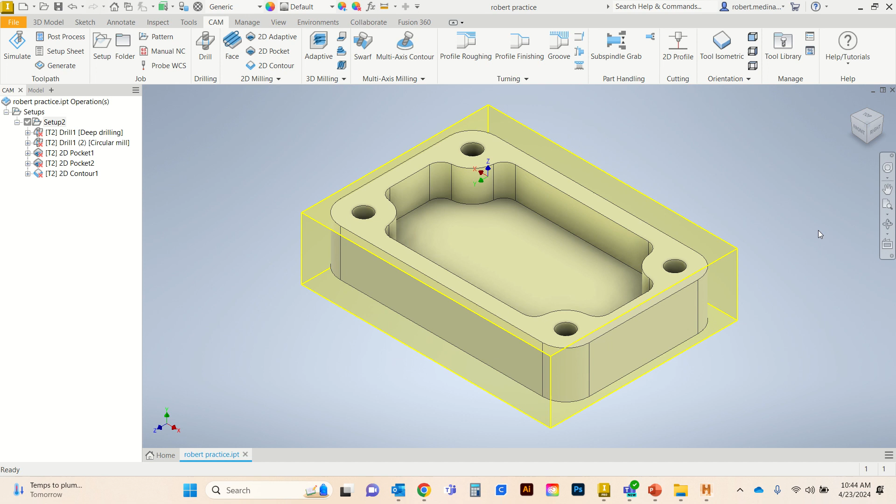So we will be using this model still from the first project. If you remember, we did all of these operations on the top side. So what we can do now, remember we put the engravings on the back side. So we will have to make a new setup.

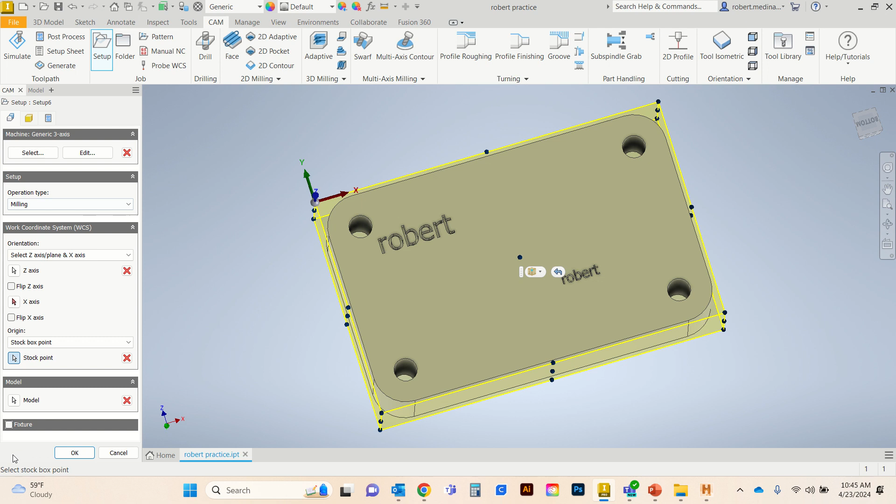So we will start with selecting our machine, make sure we're under milling, select our work coordinates. So make sure our Z is pointing up, select our 0, our origin, select this upper left hand corner, and select the model. Let's go to the next tab.

I'm gonna do a relative size box. I'm gonna hit 0 because all of this has been machined already, and I'm gonna hit 0.005. This is for illustration purposes, and I'm gonna select 2 so I can go to the next work coordinate.

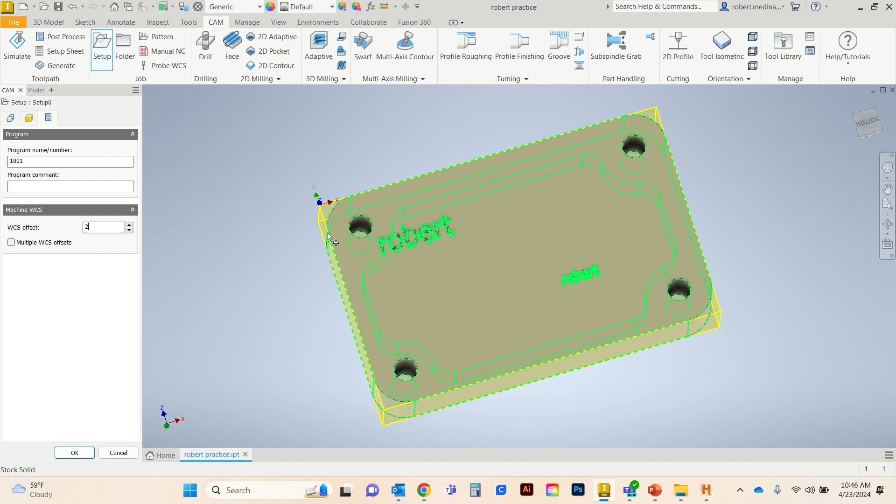If you leave this alone, it will default to G54. When you type in 2, it will default to G55. So it helps keep the other work coordinate independent to this one in case you need to make any adjustments. You can hit OK. So we have our second setup here.

So we can go under 2D milling, select engrave, and select under tool, go to VF2 or whatever you put your tool. So I'm gonna select the previously made tool for engraving plastics. Remember how I put those notes in there so you can see that, and hit select.

So now it auto populates everything that we inputted as we defined our tool. Our coolant, so it's gonna default every single time we select that tool to air through tool, spindle speed, surface speed, ramp spindle speed, our feed rate.

In case you wanna use a specific tool for different materials, you could duplicate a tool and change some of these things. So this would work. This tool would work on both plastic and aluminums, but their speeds and feeds would be different.

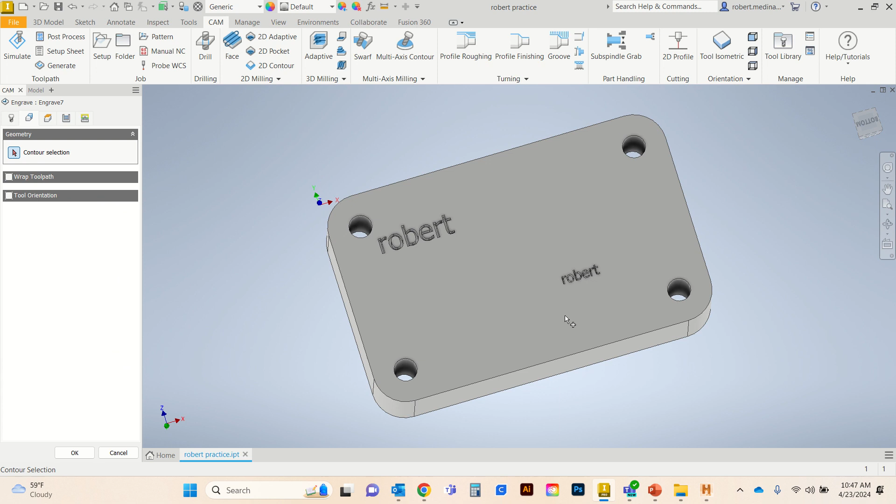So we have our tool selected. Go to our next tab and select our contour, our geometry, and got all of this. I'm gonna select all of this. And I got that selected.

By any chance, if you click the bottom, it might try to mill to the bottom in that pocket. If you don't recall, in our extrusion, we made this 0.1, but we can only cut 0.015 with this tool. So if you want to unselect this, you right click, left click it, and hit trash, and it deselects that for you.

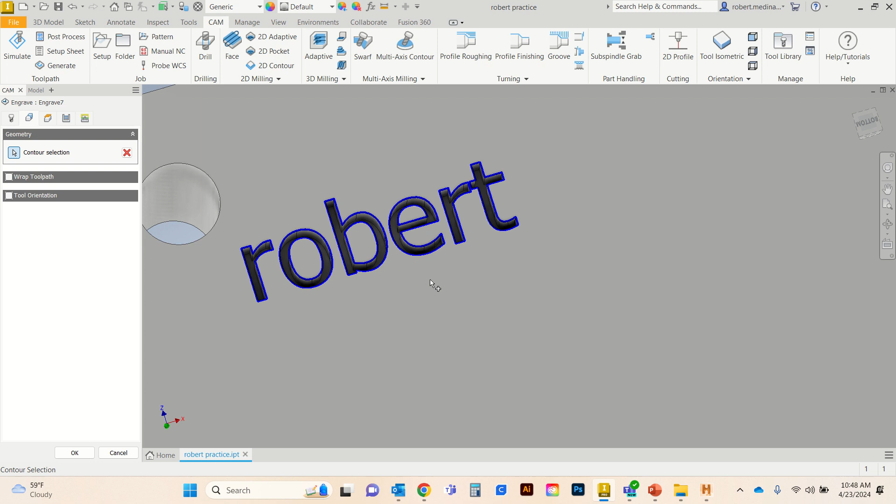There isn't much for us to look into here, so we can hit OK, yes. And to verify if it is physically possible for this tool to make your engraving, you want to turn on your stock and hit simulate.

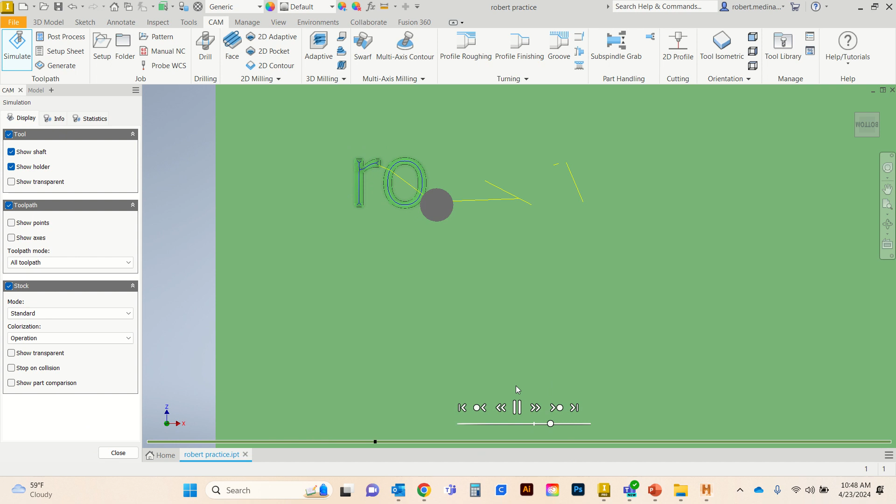So you can see it's making it. If you remember, we made 2 different size text for this reason. As you can see, it can physically make this one. So let's go to the next one.

So this first one was a 1/4 inch. This is an 1/8 of an inch. So we can go back to 2D milling, engrave.

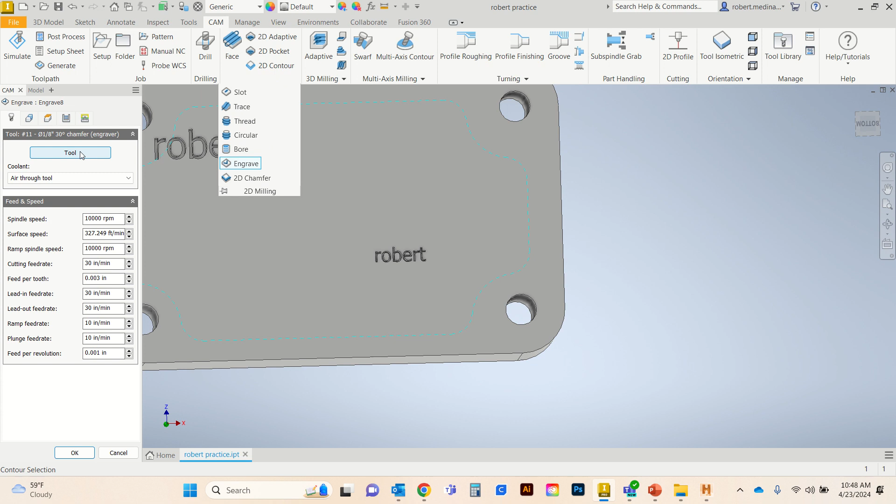We've got the same tool selected, so we just have to select our geometry again. Let me see what I clicked on there. See, I clicked on that bottom again. It's so easy to click on the wrong spot there. So just be mindful where you're clicking.

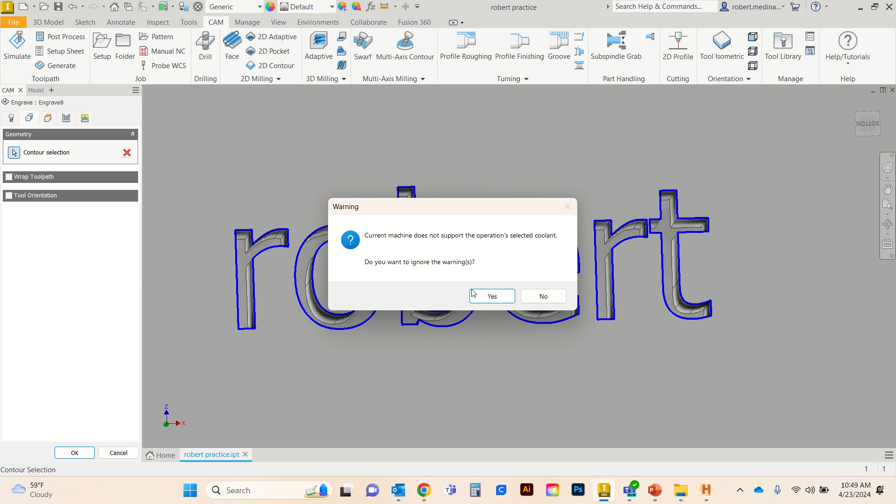And that is it. We have our geometry selected. You always want to hit yes. Well, you don't. You want to make sure you're taking a look at what it's saying.

And let's simulate this. Hit play. And you will notice it's getting through most of this. But there are some small points that it can't get. It's just not possible for this tool sometimes.

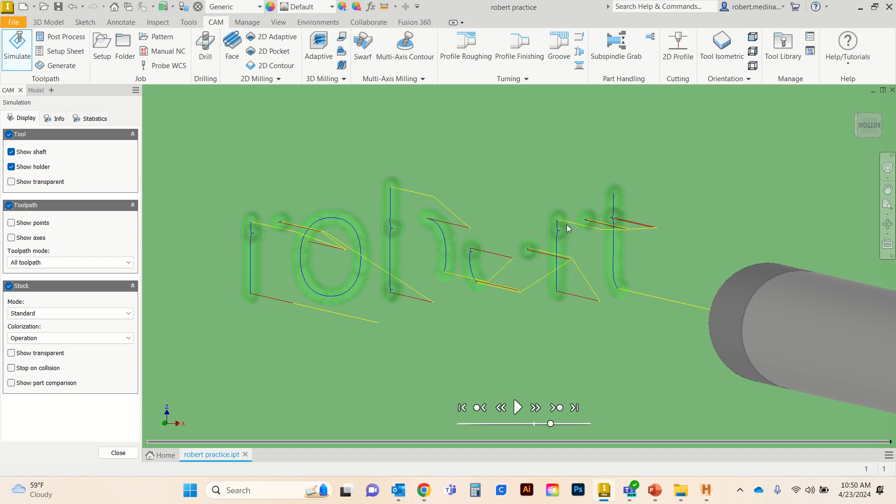So the simulation's very handy when doing text because it will save you the heartache of setting up the machine, doing the camming, just to find out that you have scribble. So that is the reason why, one, you want to make sure you have the right size text selected, and two, verify whether or not if it is possible for this tool to make that text for you.

So I will delete this one, hit delete, yes. Final thing to take a look at is in your post, just to make sure that tool isn't gonna just jam that tool into your material. Remember, the tip of this tool is 0.015.

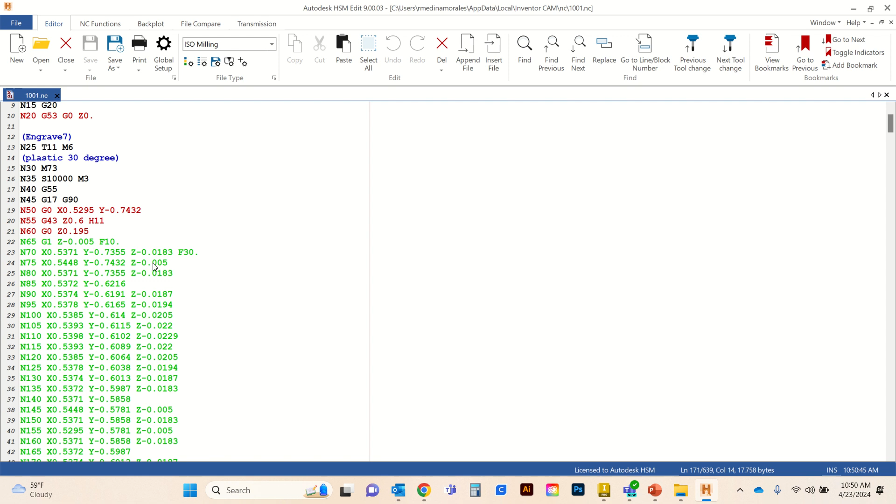So if you see a negative 0.1, you know something's wrong. So you can see our Z's are about negative 0.0197. Ideally, you don't want to go deeper than negative 0.015. That extra 5 thousandths is, if you can remember, I added that extra stock for illustration purposes.

And yes, I don't see any crazy numbers. And yeah, this looks like it will work. And that is it.